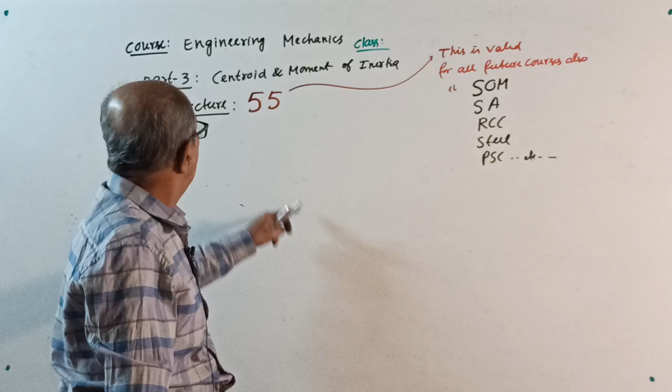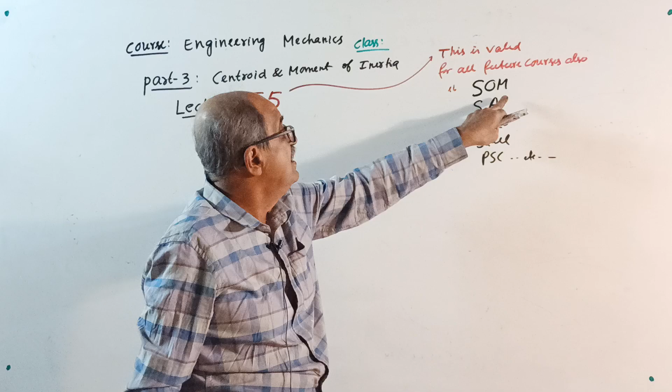Part 3, that is centroid and moment of inertia. Now, lecture 55. Up to lecture 54, we were considering centroid and moment of inertia. From next class onwards, 56 also, we will continue. Remember, what I am telling now is also valid for future courses like strength of materials, structural analysis, RCC, steel structures, pre-stress concrete, or any subject I upload.

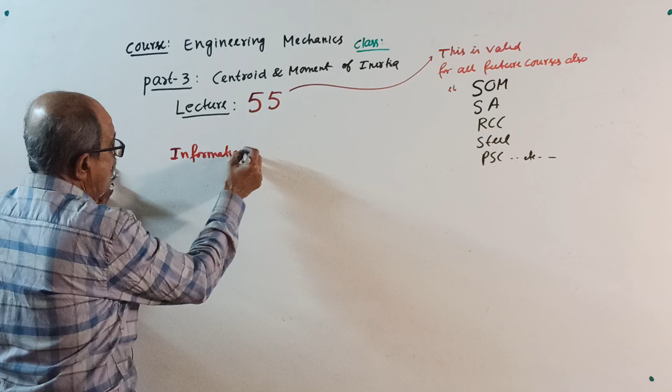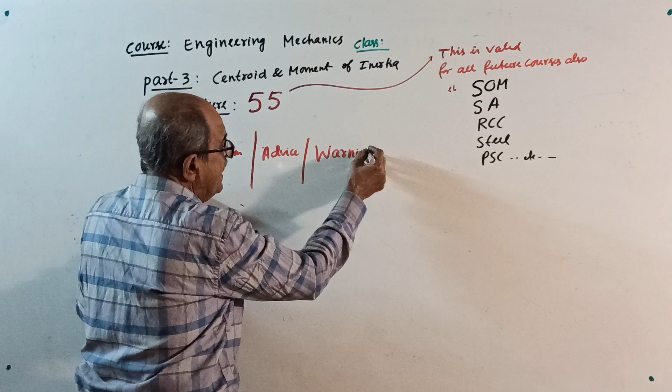So this is not regarding the subject. It's information, you can call it information, advice, or warning also. If someone will call me an arrogant person, okay, let him call. Warning, I have got the right to warn people who study from me.

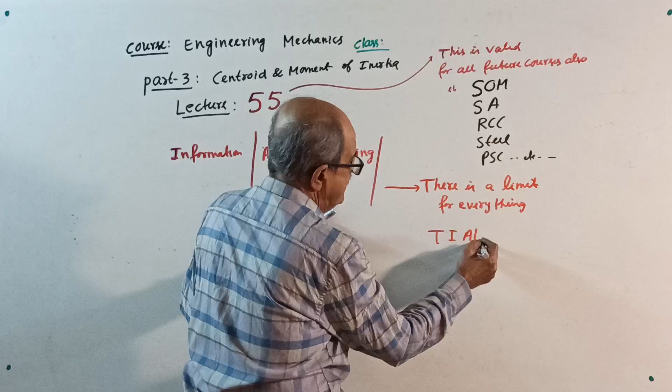Warning, and one extra sentence I will use here in this class. There is a limit for everything. Later, when it comes, I may write it in short form. See, there is a limit for everything, I may write it this way: TIALFET. I will tell at that time.

If you want to know the meaning of this, go to Engineering Mechanics Part 3, Lecture 55, see there.

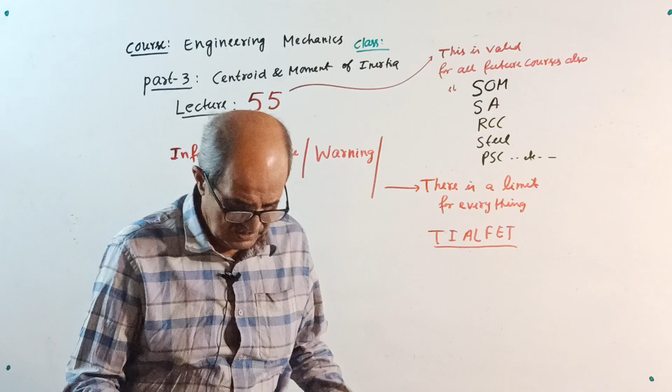I have been teaching since past more than 42 years. I'm in the teaching line, first initially in college and then my own institution. Right now I am visiting colleges for giving guest lectures. I am not regularly employed in any college, and I am also conducting software classes.

Now, the information is simple. When I take a class, whether offline or online, I give value for education. I see that each and everything is clear for everybody. I thoroughly explain each and everything repeatedly, giving so many examples. For people who find it difficult to understand technical examples, I give day-to-day practical life examples like money matters, eating something, running somewhere, driving a vehicle, etc. If a limit comes in structural engineering and people find difficulty with minimum requirements, I give practical examples so people understand.

So I give the technical concept and I always use simple language. I never go for complications. I can go to complication, I can show my level, but if I show that level, people will not attend my classes. They will say, he is telling something, he does not know what he is telling. That's usual.

So I come down to your level and teach. I know correctly what difficulty students will have. A good teacher should know correctly. First, he should know the subject thoroughly, very thoroughly. Second, he should know how to teach. And lastly, he should know where difficulty will come to students. That's the most important thing.

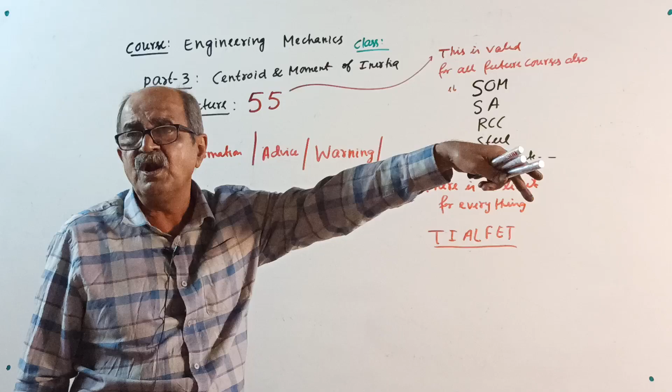Where for him everything is clear. For me, everything is clear, I don't require a crude method. But I should know students may have difficulty understanding. So I better explain some other way, or explain again and again. So one time told, second time told, like that repeatedly. Every time any concept comes, I tell it repeatedly.

Now, right now we are in Engineering Mechanics. Right now we are in what? We are in moment of inertia. The centroid location is already over, that is very important. We are in moment of inertia now.

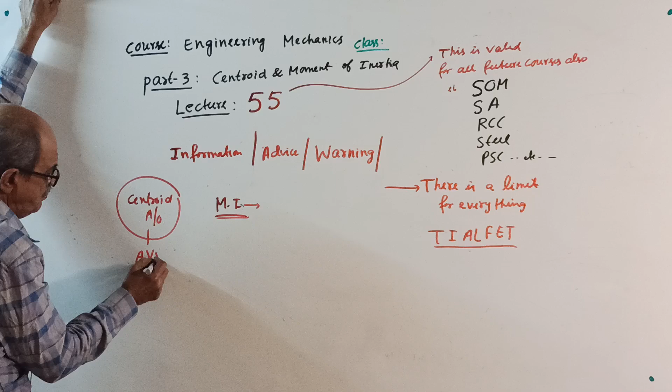When you find moment of inertia, if they want it about the centroidal axis, first you have to locate centroid G, or locate x-x, y-y. That is already over, very, very thoroughly over. Such an explanation I have given for everything. Sometimes I located x bar from this side, x bar from that side, y bar from bottom, y bar from top, repeatedly. Every term was explained there, so that everything is clear.

Those who study from me have some duty, they are bound by certain requirements. They should go through each and everything and make a note of it. Even those who buy notes from me, sometimes I will tell them to write what I told in the class.

In the notes I will use simple language, because I do not want to use money matter examples or eating examples in the notes. That I will tell you to refer to the class, I'll write the class number there. So use that. When I'm taking that much effort, I am serious about this.

My purpose is, if not today, right now I am in the beginning. One fine day I know my classes will be spread everywhere. People will realize the importance of my class, how much I am considering every detail.

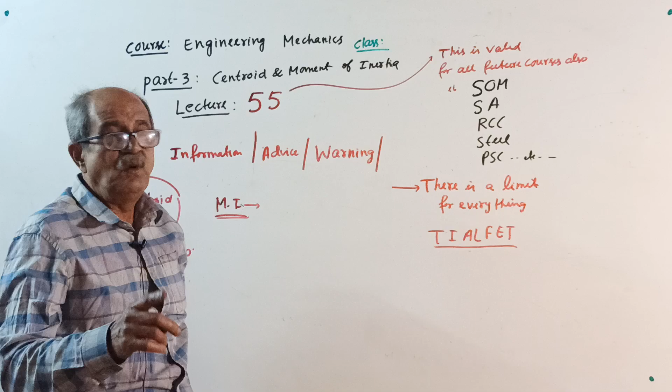So with that much explained, everything is clear. Now onwards, for moment of inertia, when I continue from the next class, that is lecture number 56 onwards, wherever I continue, I put red color only.

Wherever location of centroid comes, location of centroid G comes, then in the class, in the beginning, I will show the calculation.

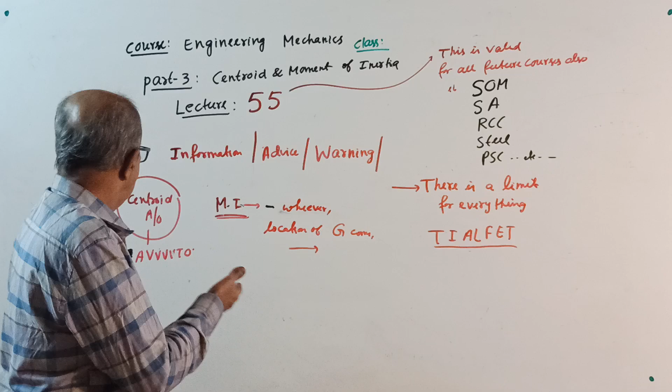I will not explain much. Then why so much? And sometimes I may not explain that at all. I will put directly the centroid location, you only do it.

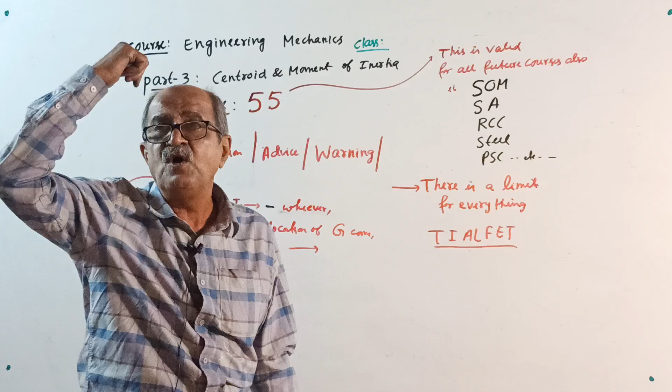So I will tell as an exercise, this lamina or area considered for moment of inertia is the same question we considered for centroid location. I will write there, part 3, lecture number so and so, it is complete there. So go there, write everything and come back here.

So I will put location of centroid, therefore x bar, y bar. That you should do, or whatever all I tell in the class, you should follow if you really want to learn from me. That's why I told, I will use the word, there is a limit for everything.

Everything has a limit. Once okay, twice okay, thrice okay. I have so many concepts, I told not one, two, three times, maybe around 10 times. Some of the concepts I told not 10 times, even more.

People will call this harsh language. Yes, it is harsh language only, but that is very important. So remember, every time I will mention, sometime lecture 55 in red color - go there and come back here, and whatever I told, you follow.

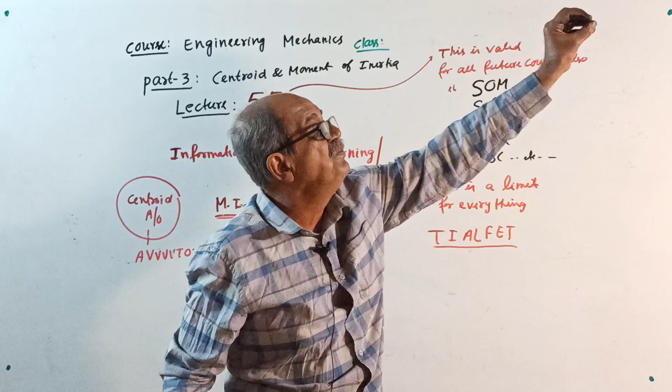Then he will say sigma M about A naught, anti-clockwise positive, minus VB into L, this is clockwise - he'll explain all of it, because otherwise people won't understand. The entire subject, one day he will put somewhere. It's like an ocean, structural engineering is like an ocean. Today he will tell something here, like that.

So those people, they may explain more, but I am covering the complete ocean, the complete ocean, therefore in a systematic order.

As I told earlier, there is a limit for everything. I will tell, lecture number 55, it is your responsibility. In case you cannot do it, then with regret I will tell, I don't bother.

But I do not want that for anybody. So some people may comment, not explaining. What, not explaining? I will tell, there's a limit for everything. Beyond the limit, not possible.

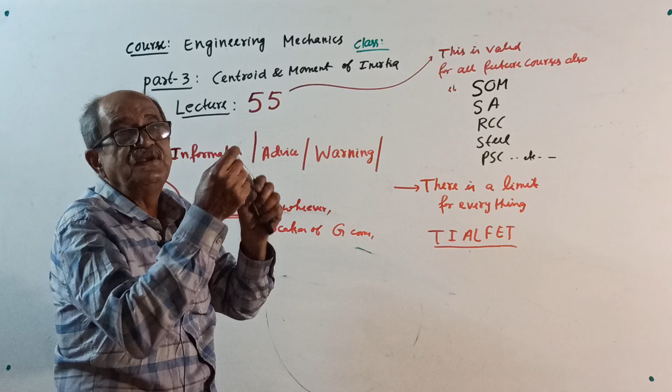Each and every class I can't tell, x bar equal to a1 x1 plus a2 x2, a3 x3, where a1 is the area of the first part, x1 is the distance of centroid of that part from the reference. No other work is there for me.

So therefore what I told here is the same for strength of materials. When I go to SFD BMD, in strength of materials or any chapter, initially very thorough explanation. Once completely over, after master examples, then repeated terms I will write there. You try it, go back and refer, already covered.

Still not understanding means lecture 55 of part 3 of engineering mechanics, that will tell you what I want to tell.

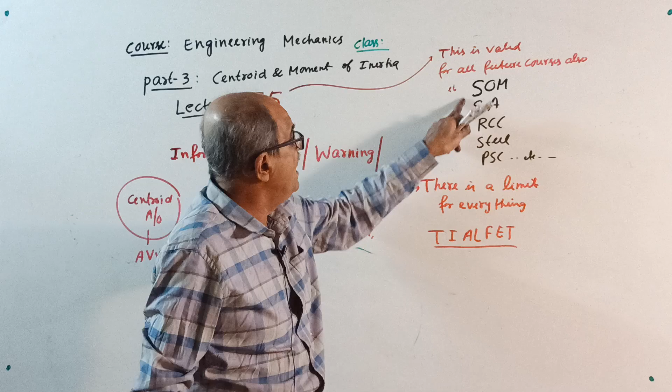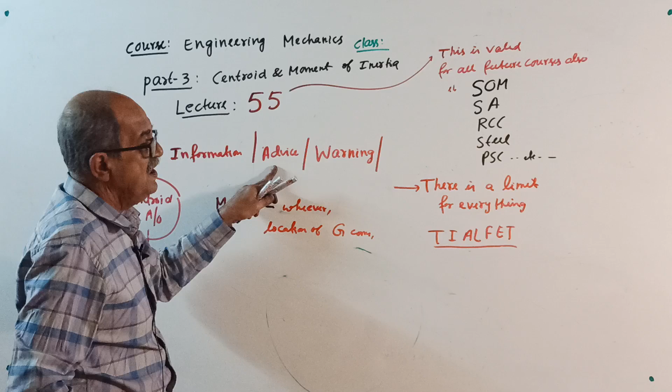So later I may upload one more class outside the subject. At that time I may tell once again general instructions, or information, advice or warning, etc. I got the right to warn.

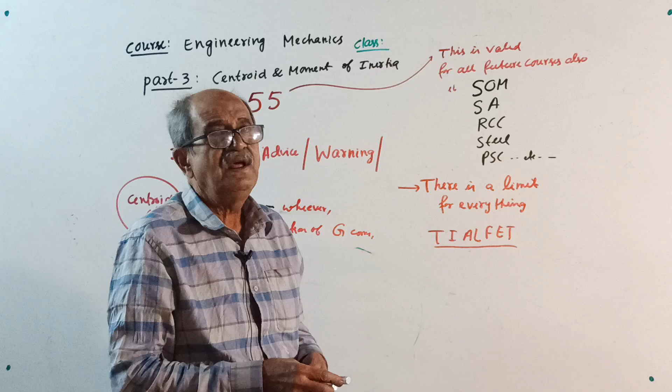So right now, remember, till I upload that one, or people who know me - suppose somebody is absent to a class and something he won't understand, he will not ask me, he will ask his neighbor. Is it already covered? Then his neighbor will tell, what do you think? If it is not already covered thoroughly, do you think the sir will tell that way?

If he is told, okay you find x bar, y bar yourself only, I will come back after 5 minutes, I will tell - so he does not know, but all others will calculate. So again, I want only people who are serious in gaining knowledge.

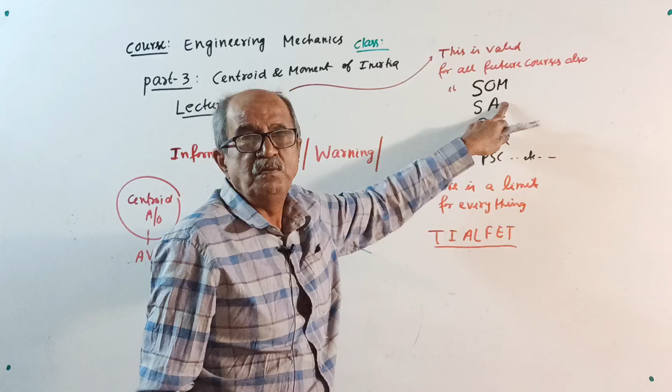As usual, remember I am telling, knowledge will never let you down. If you want to master structural engineering - engineering mechanics, strength of materials, structural analysis both determinate and indeterminate, RCC, steel, prestressed concrete, more subjects like matrix methods, advanced RCC, advanced structures, or finite element method, I will decide later. All that I will upload one by one later.

So I am going to continuously upload classes now, till I find difficulty to take the classes, till that day. If I find I am not able to take the classes, then I will stop. Otherwise, I will search - see, it's like an ocean, a never-ending ocean. So this all will come in order.

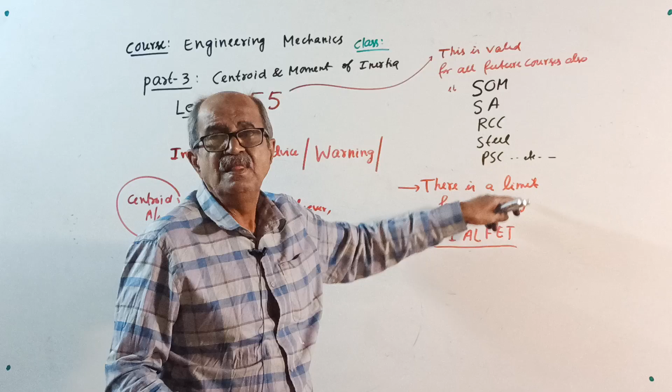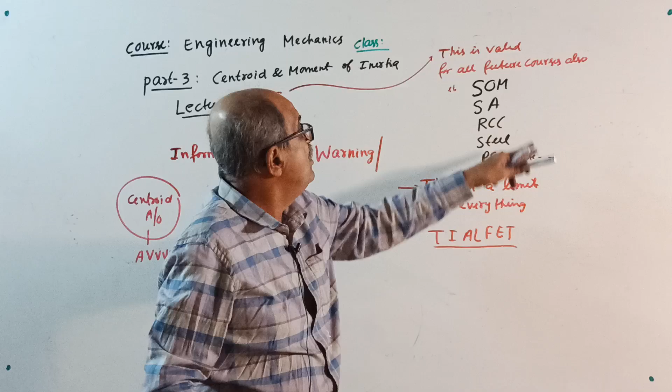And even I propose, once engineering mechanics is over, I will start strength of materials, I have plans now. So many are asking for RCC, I will parallelly start RCC also. Who knows, then I will tell strength of materials as a separate course.

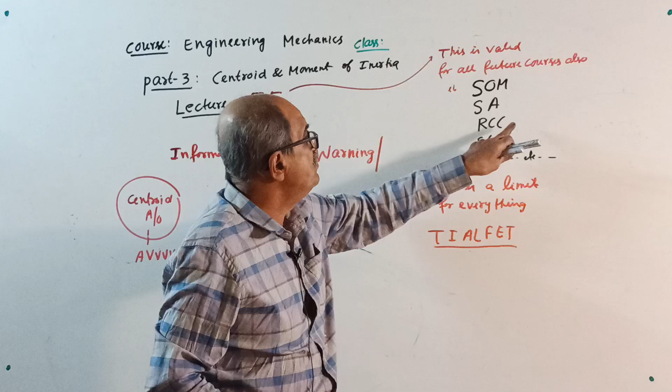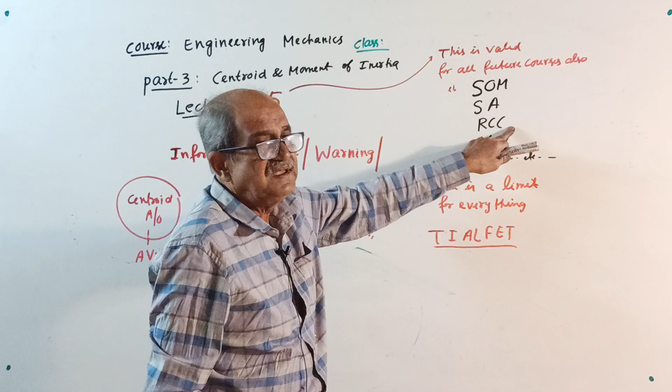Those who want to learn strength of materials, then come to RCC - wait, you study later. But some people, they want RCC or steel, I am thinking of these two simultaneously also. This will continue simultaneously, classes will come uploaded.

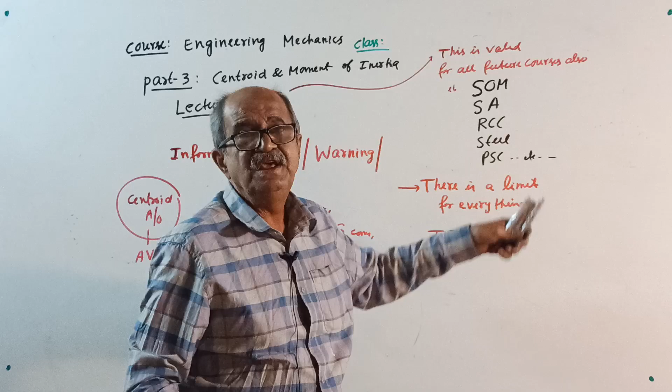In the title you can see RCC course, you can see whether it is strength of materials or RCC or steel, you can see there. Okay, that's all I want to tell.

This is, I told you, whenever I am not explaining anything and simply write the answer, it means only one thing - it was told endless number of times earlier, so that everything is clear. So it is your responsibility to study again.

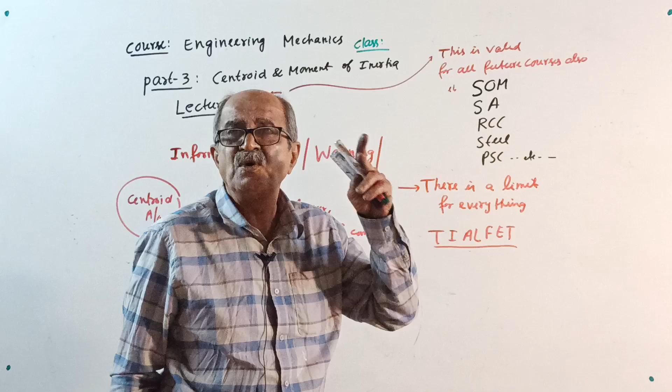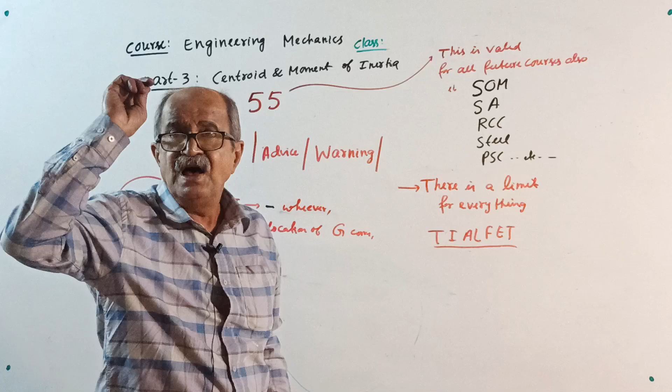So again, whatever is the class today, I told 180 something like that. If you are serious, start from class 1, study everything. Okay, that's all, thank you. We will continue the subject in the next class, number 56.